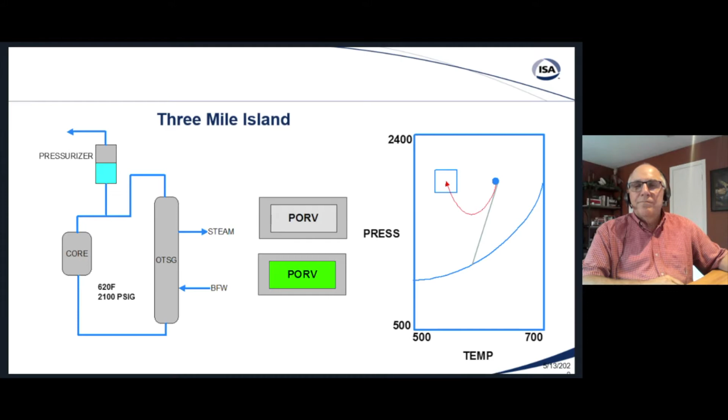So what you're seeing here is a rather simplified version of a pressurized water reactor. So I've got the nuclear core generating a lot of heat. I've got water that's flowing through the core, going through a once-through steam generator. Heat is being removed, boiler feed water is going in, superheated steam is coming out, and the cooled water goes back through the core. And so this, what they call the primary coolant system, is to remain liquid at all times. Since it's running at 620 degrees Fahrenheit, they have to maintain about 2100 psig to ensure that it stays liquid. And that's done through a pressurizer here on the top of the system, and that keeps the pressure on.

The pressurizer is also instructive to the operators. They were told that was also an indication of the inventory in their primary coolant system. So if pressurizer level was increasing, that meant they had more coolant. If pressurizer level was decreasing, they had less coolant in their primary system. It's a closed loop system.

So the particular event that occurred actually started with a maintenance activity around a condensate polisher that resulted in a trip of the boiler feed water pumps. So I no longer have heat removal in the steam generator. Temperatures increase, and the reactor trips. And so far, all the safety systems are functioning as designed. And so the reactor trips.

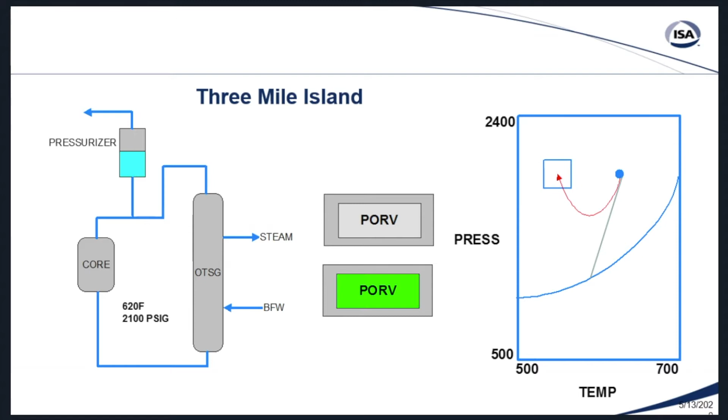So the notion that operators bypass safety shutdown systems, I found out very quickly, was not a unique feature in the nuclear power industry, but you see it at a variety of locations. So Dr. Perez was going through and talking about some of the origin of human factors and where it came from. World War II was one of the key places where that was happening.

Now, some people might be thinking, oh, well, that's 80 years ago, World War II. Technology certainly has advanced. We certainly couldn't make those same sort of mistakes today. But it turns out that perhaps the designers of systems are still human, and they still make various mistakes and errors. I was at a chemical plant, and I'm out in the unit with an operator, and we're watching as the maintenance personnel are coming up to work on their safety shutdown system cabinet that's out in the unit.

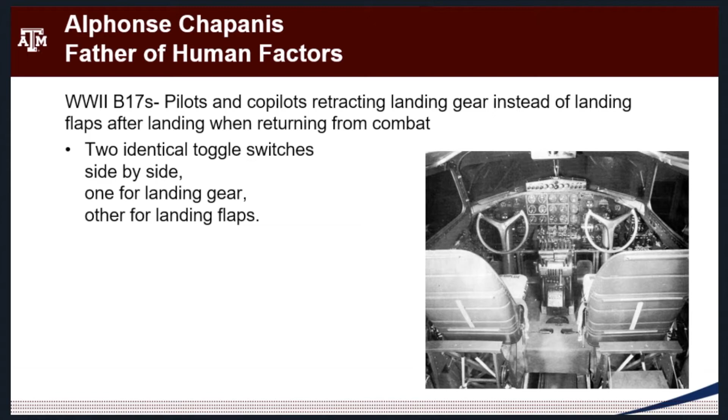So while yes, human factors started in World War II, we're still seeing the same sort of events occurring that were present then. In this case, mismatched controls, mismatched indications that are happening today in almost any plant that we go to. So Dr. Perez broke down the area of human factors into 3 different categories, and I want to talk a little bit about that. So she talked about information processing, where one of the key things that we find errors occurring in is around how people are processing information.

So what I'm showing you here is a very simple operator-in-the-loop feedback control mechanism. So I have some sort of process with some output that's occurring. That output is compared to a reference: where am I at? Where do I think I want to be? And if they're significantly different, an error value, a deviation, is created. And if it's significant enough, hopefully the operator will take action to bring the process back in alignment, to zero it out. So what has to happen for the operator to do that?

Well, there's really 3 different steps involved when this is occurring. First, I have to detect that there's an error. I have to know that something's wrong. I have to identify, well, what is it? What is it that has occurred? And then I have to take action associated with that particular step. I have to compensate for it. Where you find a lot of the major accidents that involve what we would call human error or design-induced error, they really deal with these first 2, the detection and identification steps.

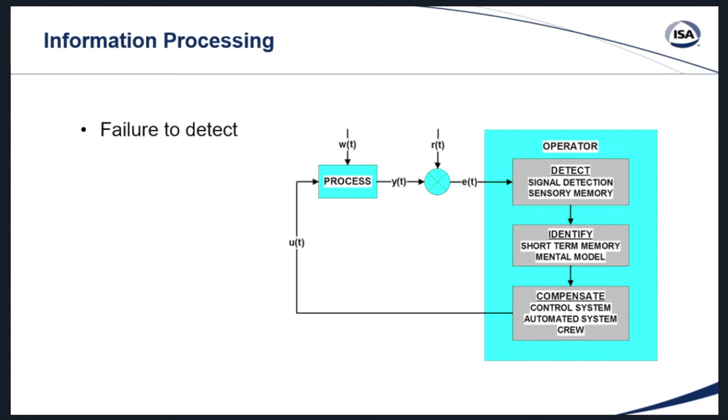So failure to detect, that is a key item where they don't even realize that anything's wrong. And so you can find it for a couple different reasons. I was at an olefin plant one time, and their alarm rate was coming in so fast that the operators essentially had ignored it. There was no point in looking at the alarms. They were coming in constantly. Most of them didn't mean anything. And so the operators really weren't using the alarm system at all.

The area manager of that particular unit was asking me about it, and I said, well, I can guarantee you with 100% that the operator is going to miss an alarm, that there is going to be an alarm that you want them to take action on that they're going to not see, and they're not going to take the appropriate action. I said, the problem is I can't tell you which alarm it is. I don't know which one they're going to miss, but I can guarantee you that, with 100%, they're going to miss some alarm that's in there.

You hope it's an alarm that has low impact on the plant, but it could quite likely be a more serious alarm that's happening. So you can have the problem where I'm having so many alarms, I don't even notice that there's a problem that's occurring. I can have issues where I fail to detect it simply because it gets lost in the noise of the system.

I was at a plant. This was a Canadian refinery, January 1st, so the middle of winter. The operator had an alarm come in related to low level in their treated water tank. And for a variety of reasons, they failed to take action when that alarm came in, and it stayed on the alarm panel for 8 hours. So they went 8 hours with no treated water coming into their treated water tank, and 8 hours later they tripped all the boilers on loss of boiler feed water.

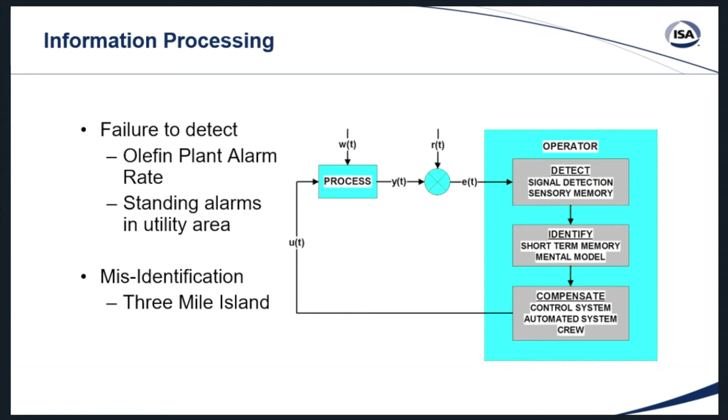Well, we've already talked about one of those cases, the Three Mile Island accident. How did they bypass their safety system? Why did they bypass their safety system? Well, they misidentified the problem. They thought they were in an overcooling event when in fact they were in a loss of cooling event. So failure to generate the correct identification. But it isn't unique to the nuclear industry.

And in fact, we saw this at a particular refinery in a somewhat ironic situation. At this particular refinery, they had put in a fault-tolerant safety shutdown system on the fired heaters for their crude unit. And with that, they were suspicious of their alarm system. So they said, well, we don't want the safety shutdown system heater alarms mixed in with our process alarms. So we're going to install its own dedicated hardwired annunciator panel so that none of those SIS alarms are going to get lost with the other alarms.

Well, they had an event. The plant is going through an upset. So eventually the conditions for trip are met and the heater trips. Well, during all of this, a lot of alarms are going off, a very chaotic situation.

So if you were to look at that annunciator panel, in order to facilitate the processing of the information, they had color-coded the tiles on that panel. So white tiles indicated some sort of fault within the SIS, communication issues or something like that. There were red tiles on there that indicated a pre-trip condition. So if you were nearing a trip, but you hadn't reached it, you would get a red tile alarm. And if the condition continued and you actually tripped, then there were green tiles that lit up

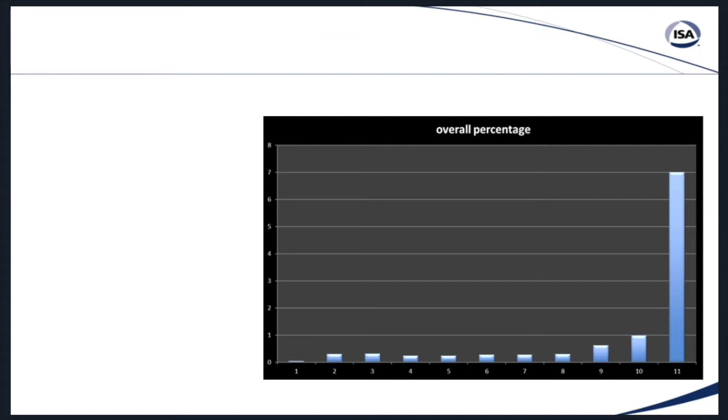I got to investigate a heater that had blown up, and it's around misidentification. The lights on the furnace pilots were facing the east, and there were 10 burners, but on the 5 burners that were facing the east, the sun was hitting them just right that morning, and he had a flame out, and he didn't realize it. He looked at the indicator lights in the shade, and they were off, but he looked at the indicator lights in the sun, and they were on. And so the operator got confused, and there was this moment of confusion, and he ended up hitting the igniter and causing the heater to explode.

Luckily, there weren't any injuries there, but sometimes it's the environment around us that causes us to misidentify, right? Well, and that's where somebody would say, oh, it was a case of operator error. We would say, no, that was design-induced error, because the designer should understand the environment that it's being used in and realize, well, if this is in the direct sun, then I need to provide some sort of shading, or I need to use some other indication to provide that sort of indication.

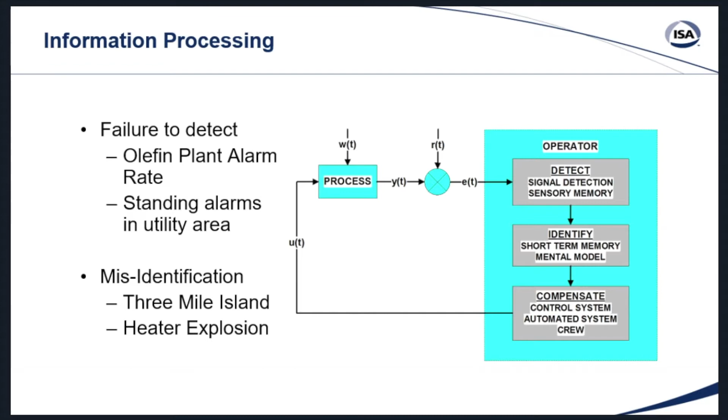So the operator, and this is what we would say, the operator was being set up to fail, and he did fail, but it was because whoever designed the system really didn't think about, well, how are they going to be using this? Where's it being used at? And doing the correct design, because as you obviously found out, this particular design doesn't work in bright sunlight. And if it was night, would he have made the same mistake? Probably not. But they didn't design for all the operating conditions. Right. So you see it all the time.

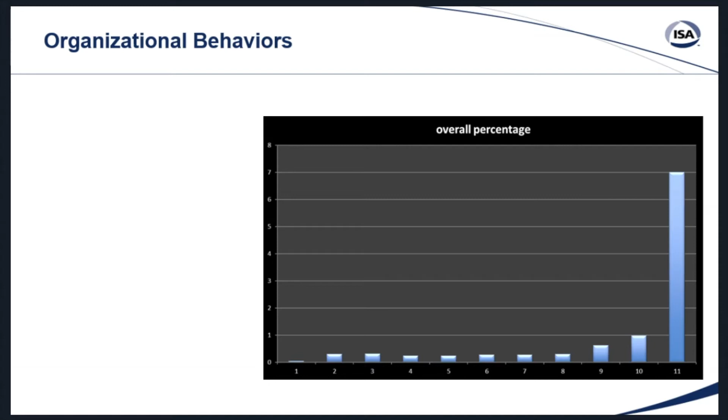Dr. Perez talked about the organization, which is really the sort of environment that they're functioning in. I'll bring in one last issue from the nuclear power industry and from an organizational standpoint. This was early on. I normally didn't have to write purchase orders or requisition material, but I eventually was doing some alarm tiles for the control rooms at Three Mile Island Unit 1.

And I was filling out the purchase order, and this old project engineer comes up to me and he says, oh, hey, write on there 49 CFR 10 does not apply. And I said, well, what is that, and why am I writing that on there? And he says, don't worry about what it is. But if you don't write that on there, then your purchase order is going to go to quality assurance, and you're never going to see your alarm tiles.

And so they had created a system that was so complex that people had learned to develop workarounds in order to actually try to get their job done. In this case, it was probably not an issue, but we're seeing that more and more, where if you're going to thwart human behavior, humans are very good at finding ways around it. So from an organizational standpoint, you not just have to look at what are we trying to achieve, but what are we likely going to do as a result of that?

One of the issues that the Center for Operator Performance tackled a number of years back had to do with fatigue management. This was when the guidelines were coming out in terms of continuous days on the job. The Center for Operator Performance did some data mining at four different refineries across the U.S., looking at the probability of operator error based on continuous days on the job. This chart shows the error probability for each day on the job.

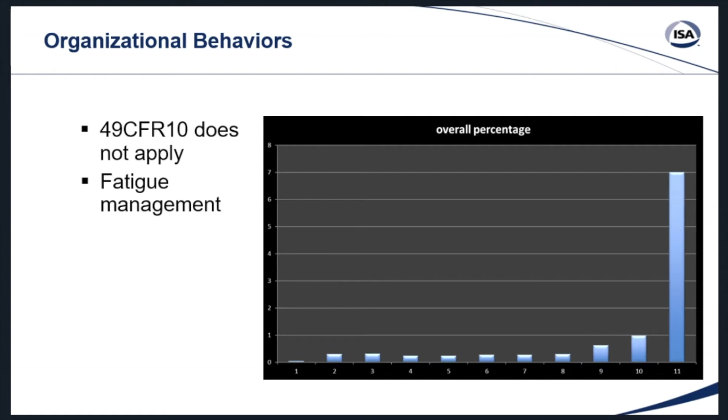If I'm having to manipulate some sort of safety system, either maintain it or operate it, and I'm doing it on my first 8 days on the job, chances are I'm probably not going to make a mistake. But as I start increasing it, that probability goes up dramatically. People have asked, well, what about past day 11? The problem was we really didn't have enough data to make any judgments on that. So that would be a question you might want to have.

So organization comes into play: wiring up safety valves. That's something I see when I'm out with operators in the unit. You don't see it as much anymore, but you certainly see places where the wires are there near the safety valves so that should they trip, they're not going to close because somebody's wired them up. I was with an operator; it wasn't a safety valve, but it was a spring-loaded valve. We go to that valve, the operator opens it up, there's a wire, and he puts the wire on it so it stays in the open position.

The irony was we had just come from the shift change meeting, where at the very beginning they had emphasized safety, be safe out there, and let's do things the right way. And this was a company that routinely gets accolades for their safety culture. Ten minutes after that meeting, he takes that spring-loaded valve and wires it up. We would attribute that to the cultural issue they're operating in. He is bypassing a safety system, and somehow the organization has not imparted the need that this is not the way things are supposed to be done.

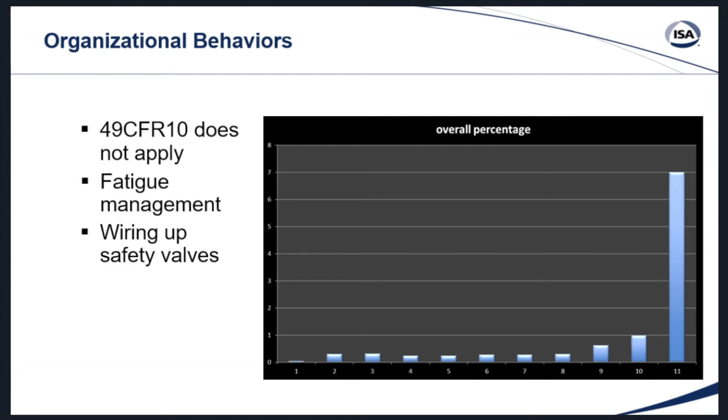We've seen it in others in terms of when we're talking about alarms and alarm response. A plant I was doing early on, as part of alarm rationalization, you document what action the operator is to take when a particular alarm comes in. And so we got to this one alarm and I said, okay, what do you do when this alarm comes in? And they said, well, the first thing we do is bypass the safety shutdown system.

And I said, well, I'm a little reluctant to put that in as the official response for what you're supposed to do on this alarm. And they said, but that's what we do. That's why the keys are in the safety shutdown bypass switches on the control panel. They were converting from pneumatic to distributed control. We keep the keys in the safety shutdown system so that when we get events like this, alarms like this, we can immediately bypass the SIS.

And so I was able to convince them not to document that they should bypass the safety system, but they all assured me that is exactly what they did. Now, those keys are sitting in those locks, so certainly everybody in at least middle management knew what was going on and how they were doing it, and yet the organization allowed it to continue. So the organization in which the behaviors occur is, again, a strong influencer on whether you're going to have a situation of, quote, operator error, or the operator taking improper intervention on the system.

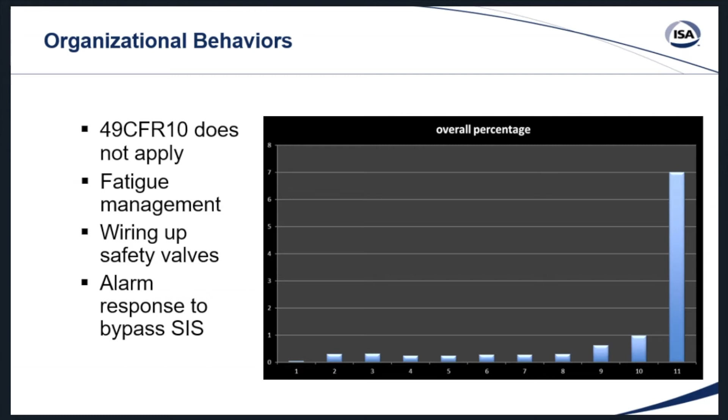So I may have 3 different units under a single operator's span of control. So he's controlling these 3 different units. Unit A may have only a single operator that works it, but units B and C are both handled by one operator. So this operator has 2 units that are involved. So when they have a problem and the event occurs, and I'm actually supposed to use the procedures, then I run into problems.

So I was actually with a console operator in this scenario, and we were going through a power dip event, and he pulls out three 3-inch ring binders, one for the power loss on each of these units. He has them sitting in front of him. And of course, I asked, so how does this work? Do you do all the steps on unit A and then go to B and then C, or do you do step 1 on A, step 1 on B, step 1 on C? And he just kind of smiled at me, shrugged his shoulders and said, well, your guess is as good as mine. I'm not sure what order I'm supposed to be doing this in.

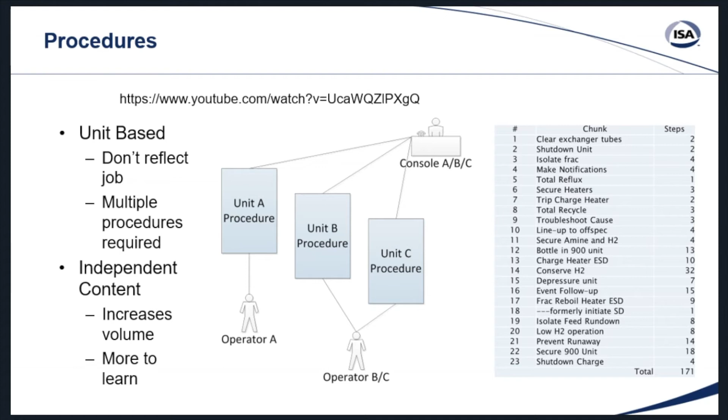There's a lot of plants that require their operators to learn the emergency procedures. And how do they do that? Well, they do it a procedure at a time. And yet, there's really only 23 tasks, if you will, that they need to learn. If I learn those 23 tasks, then I've learned all the tasks in all the emergency procedures. Again, they're just reoriented. Some have more tasks, some have less. But the way in which we're presenting the information is making that far more difficult than it need be. So those are some of the key areas. Again, I urge you to watch Camille's presentation if you weren't able to catch it.

But the human factor, operator error, was present in World War II. We see it today, and it can have catastrophic consequences if operators make the wrong diagnosis, or they fail to detect a problem in which it's necessary for them to intervene.

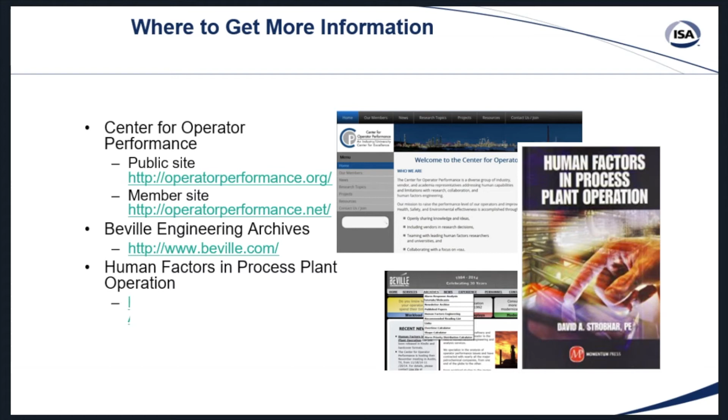I will recommend a book to you. It's called Drift into Failure by Sidney Dekker. Dr. Perez talked about some of Dekker's research. I found this book to be very eye-opening, particularly from the safety system standpoint, because he talks about how we try our best to prevent a number of accidents through various interventions and safety measures, and how oftentimes we unwittingly drift from those and into a particular failure mode.

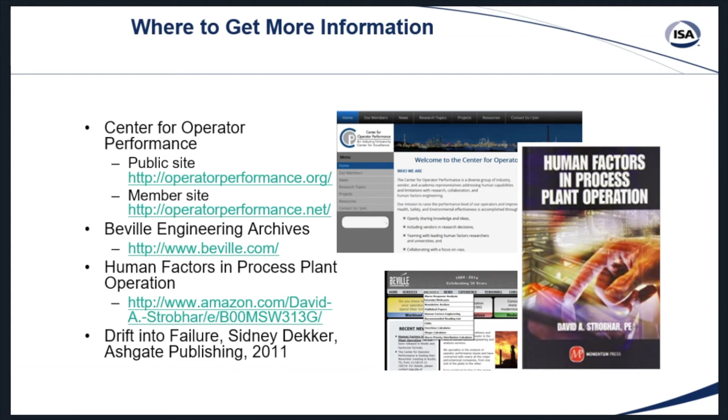But at the same time, there are cases where there is just random error. And now some of the numbers that are being used are way too high. So if you look at a person manipulating like 100 switches, you would expect a maximum error rate of about 1%. So that's random error rate: about 1 out of 100 in a repetitive task, you're going to find a mistake being made. But it does happen. More often than not, like your heater example, there were confounding issues associated with it. The person just didn't go up and make a random mistake. They were confused.

Yeah. There's a couple of slides following this that I think could add to some of the questions, but a question I'd like to ask you that's in the slides coming up is, someone goes out and parties all night and they've got this hangover deluxe, and he's an operator. They come to work and they make a mistake because their head is just not in the game anymore. How do you classify that?

Well, this has come up in some other industries. The nuclear industry was evaluating this. I don't know whether they implemented it, but they have a fitness for duty test. So when you come in that morning, nowadays you have to get your temperature taken for COVID-19; you're going to have to do this fitness for duty test and make sure that you're capable of doing it. People are going to make random mistakes. So that person's going to make a mistake. The question then would be, you should have enough layers of protection, if you will, that one mistake does not result in some sort of catastrophic event.